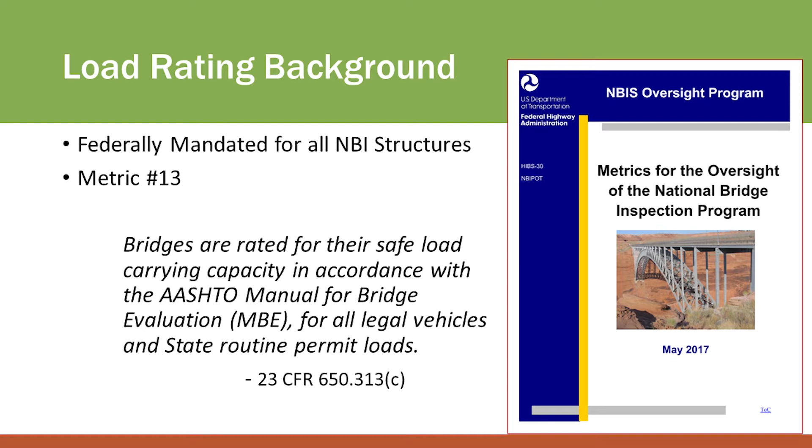So many of you know what this document is. It's the metrics for the NBIS. Metric number 13 comes out of 23 CFR 650 subpart C. Bridges are rated for their safe load carrying capacity in accordance with the AASHTO Manual for Bridge Evaluation for all legal vehicles and state routine permit loads. So we have to load rate NBIS bridges.

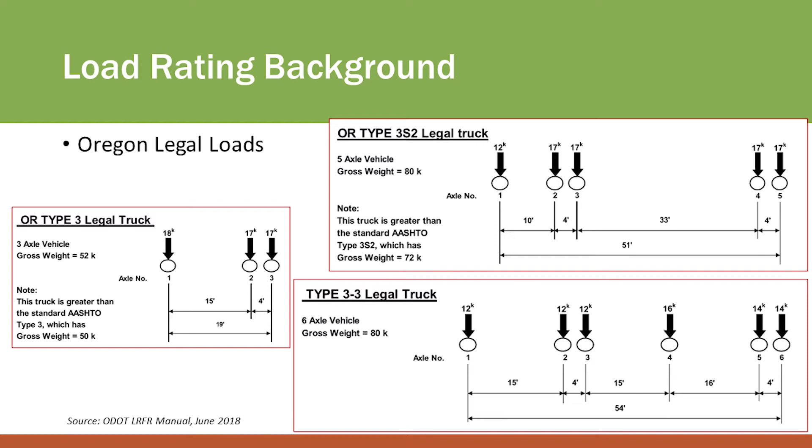These are the traditional classical trucks that many of you are familiar with, the Type 3, 3S2, and 3-3. ODOT does bump up their Type 3 and 3S2 slightly beyond what the AASHTO trucks are, but these are a 52 kip truck and then two 80 kip trucks.

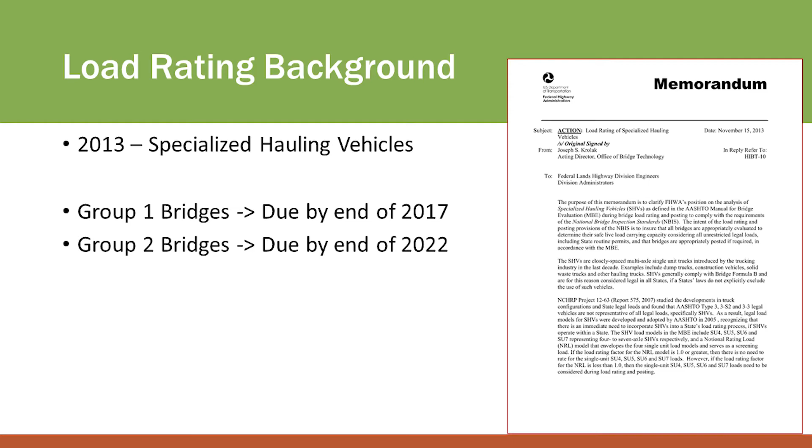Then in 2013, we had the memo from FHWA to clarify the load rating requirements for specialized hauling vehicles, or SHVs. It grouped it into two different categories. So your Group 1 bridges were the maybe worse bridges. These were due by the end of 2017. Group 2 is due by the end of next year, 2022. Basically, Group 1 bridges are bridges with rating factors of less than 1.3 for your traditional Type 3, 3S2, and 3-3 loads. It's kind of a screening.

Many of you have heard of the SHV Group 2 deadline. That's next year.

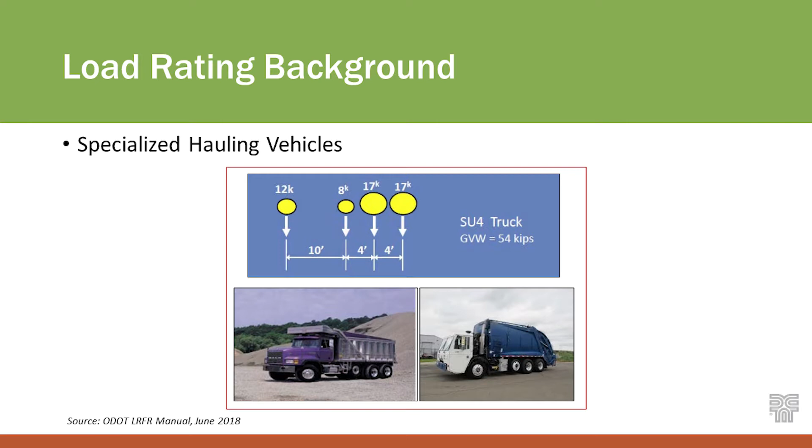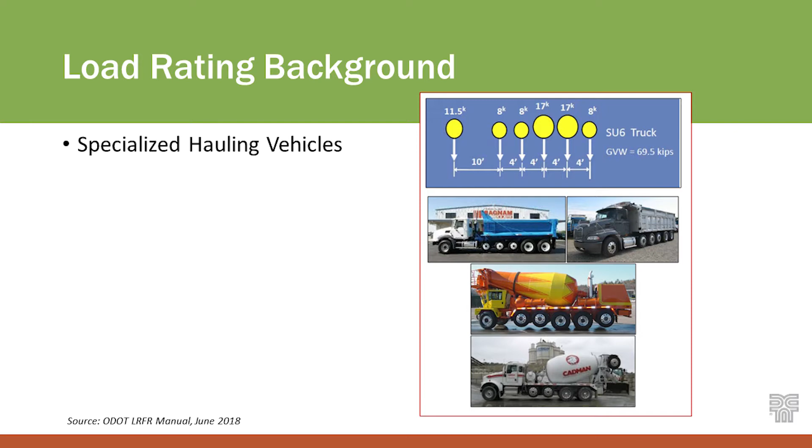What are the specialized hauling vehicles? This is the SU4, a 4-axle heavy hauling truck. SU5 is a 62 kip truck, and we just keep adding axles and length and weight to our trucks. SU6 and SU7 -- these are all legal vehicles on our roads that we have to rate bridges for now.

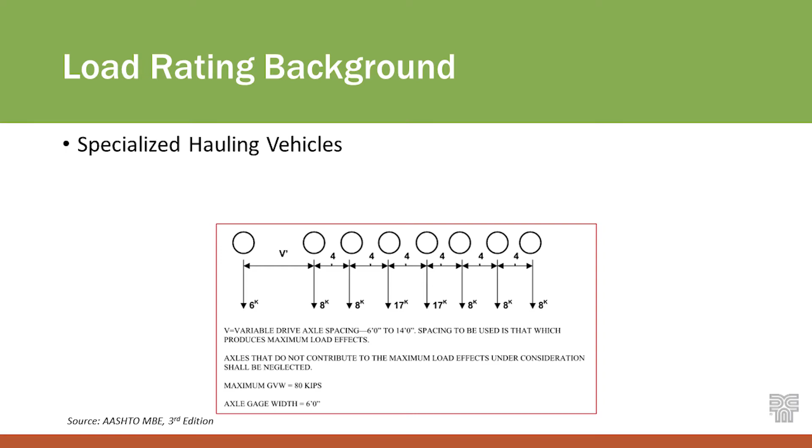Then we have the notional rating load, the NRL. ODOT does not use this. A lot of states do, as a screening load. If this passes, then you don't have to rate the 4 SHVs.

Then fast forward to 2015, and we have the FAST Act, the Fixing America's Surface Transportation Act. This is when we got into emergency vehicles. Now, for emergency vehicles, the first caveat is it has to be on an interstate or within 1 road mile to or from the interstate. Some states have decided to just rate all their bridges for emergency vehicles because they're doing it anyway.

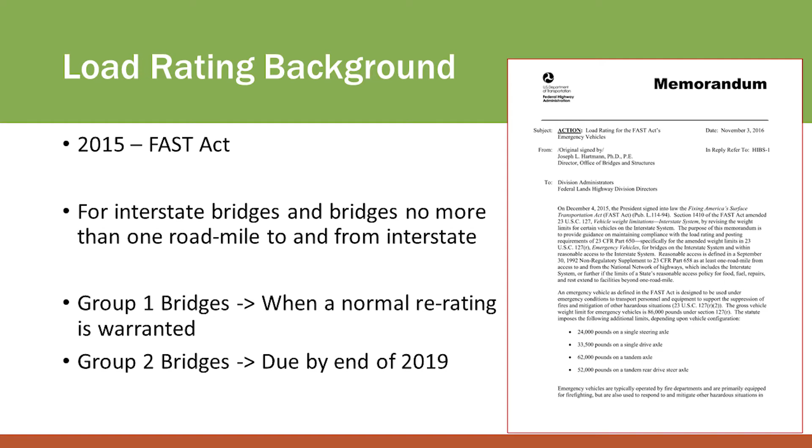Again, we have two groups, but this one's backwards -- Group 1 is good, Group 2 is bad. Group 1 is inventory rating factors for HS20 greater than 1.0, HL93 under LRFR greater than 0.9, Type 3 truck greater than 1.85. If you meet those criteria, you can re-rate the bridge for emergency vehicles whenever a normal re-rating is warranted. Group 2 is worse, got to be done by the end of 2019. Some states are on plans of corrective action -- maybe they didn't make that deadline, but that was the official communication in 2016.

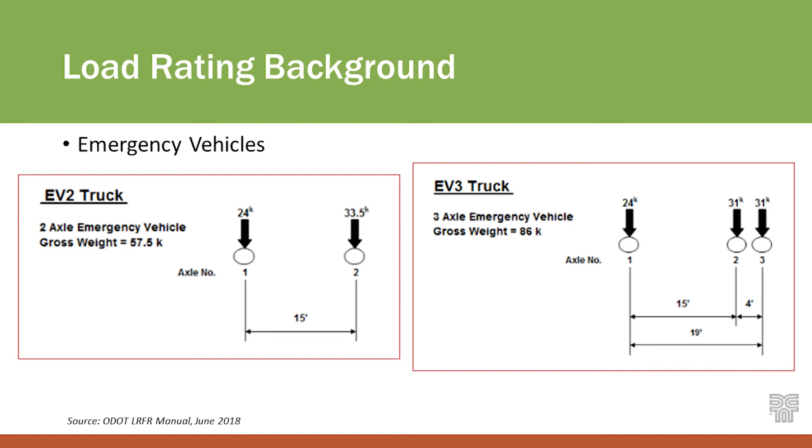So what are the emergency vehicles? Well, they're very heavy over short wheelbases. You're talking about a 57.5 kip truck over 15 feet, or an 86 kip truck over 19 feet. Heavy, heavy axles.

62 kips in tandem on the EV3. You can imagine for short spans, this truck very often controls.

So what's the big problem here? Well, it's concentrated loads. It's these heavy axles. Let's look at the Type 3 S2.

This is our standard tractor trailer. We're over a 51-foot wheelbase, and we're at an 80 kip truck, very standard truck on the interstate highway system. Now look at our EV3. We're an 86 kip truck, so heavier truck over a 19-foot wheelbase.

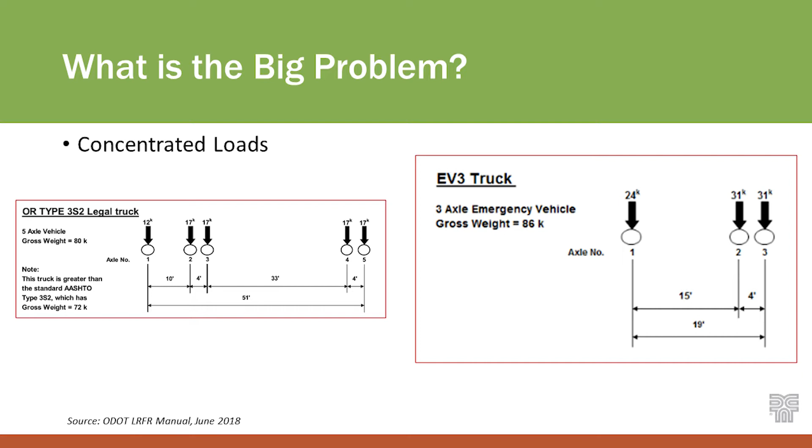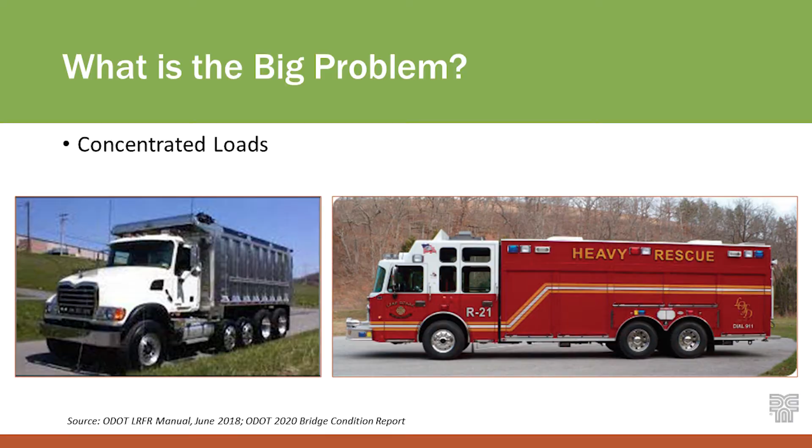Very heavy. ODOT's load rating program, how is it structured? What does the framework look like?

This message is echoed in many other states as well, just a growing inventory of preservation and replacement needs. So I wanted to go through, okay, how big is ODOT's program compared to other neighboring states?

So Washington is 8,338. Now this information is from the InfoBridge portal, so there may be some error. This also includes bridges that are located in these states that may not necessarily be owned and maintained by the state or local agencies, like federally owned and maintained and inspected bridges.

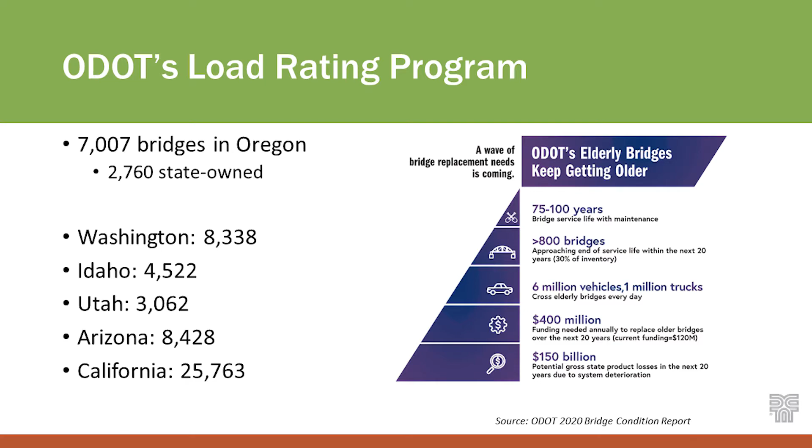Idaho is at 4,522. Utah is at 3,000 and change. Let's come here to Arizona, 8,428. And then just for grins, California, wow, 25,763. So that kind of gives you an idea of what Oregon's inventory looks like with respect to other area states.

ODOT has a really strong internal staff of load rating engineers led by John Rupert, who's their senior load rating engineer. But the vast majority of the load ratings coming out of Oregon are through their consultant partners. Those partners I've listed there.

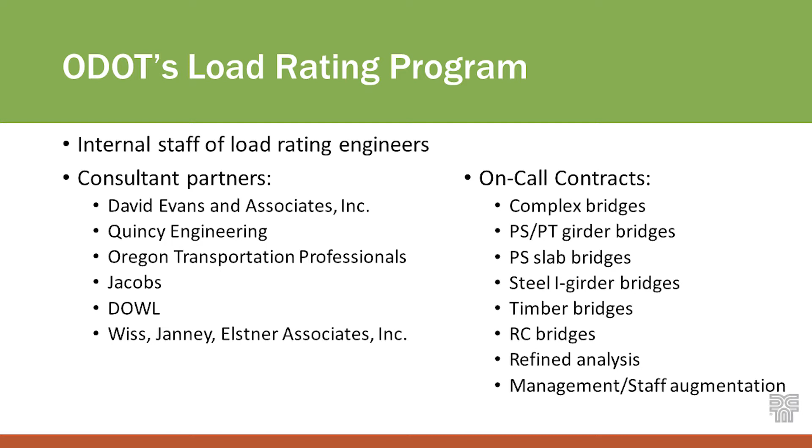We have several different on-call contracts that are all based on bridge types. So you go all the way down the list. Towards the bottom, you've got refined analysis, and I'll talk about that towards the end of the presentation.

There's also a management and staff augmentation contract. There are several contracts where we help the department scope load ratings, new work order contracts for other consultants. We can't scope our own bridges or assign our own bridges. We review load rating packages put together by other consultants, and just any other type of staff augmentation work that ODOT could potentially need.

We have some poor load rating results. We know that. We're rating for these heavier vehicles. Now, what's next? How does ODOT respond?

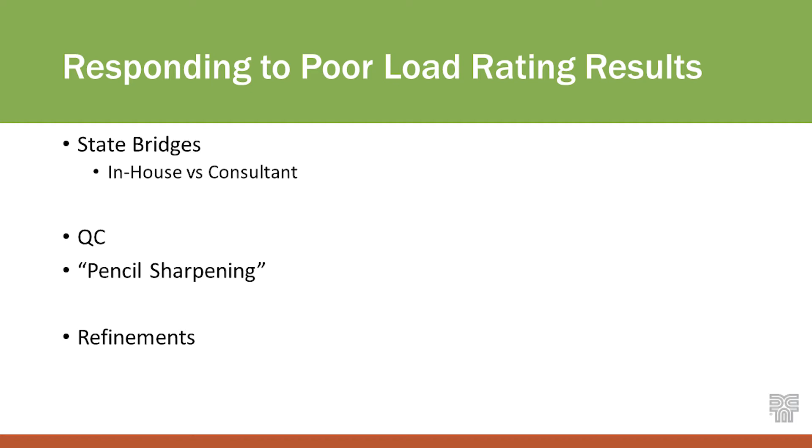You get to the end of your QC and you have some low rating factors. Well, there's always some pencil sharpening that can be done. We always love that term, pencil sharpening. And it's funny how that has become like a technical term. Like we'll get a load rating finished up by one of our load raters, and rating factors are 0.85 for the SU5. And I say, well, have we pencil sharpened yet? That's like an official term now.

Load rating in and of its own nature is you use conservative assumptions initially to get through the process efficiently. So you document those assumptions, and when you come back and get low rating factors, you know exactly where to refine some of those assumptions. That's always done before on the consultant side, before the package goes into ODOT. Once that package goes into ODOT, then you have to make decisions on whether or not refinements need to be made or can be made.

For state bridges, ODOT has a lot of different levers they can pull for refinements. I mentioned the refinement price agreement, where they can package up refinements and send it to a consultant and say, this is what we want you to do - either a grillage model, refining your live loads, or even instrumenting and load testing something. We also have quite a bit of leverage in terms of contingency scope on particularly complex load ratings, where we can say, this is what we're getting, it's because of this live load thing or this capacity thing, and if we do this, this, and this, we can refine it. And they say, yes, go do that and give us a budget for that. So that's another lever they can pull. They can also go down their own internal flowchart once we submit the package and decide how they want to proceed. There's a bunch of different options ODOT can utilize there.

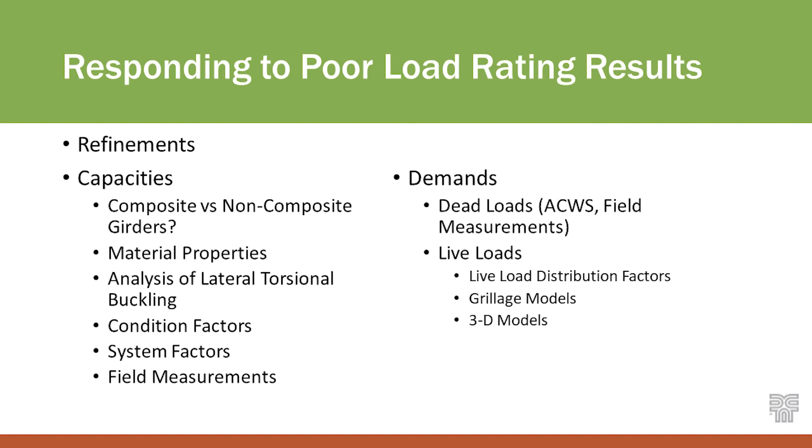And then just field measurements. Sometimes many of us that load rate know that the information that we have from some of these local agency bridges that were built 60 years ago plus can be very poor. And so sometimes it's just a matter of going out there and realizing that, hey, we've got diaphragms, or we've got the owner welded on cover plates 25 years ago, or something like that.

Conversely, we can refine demands as well. Dead loads are fairly simple - we can do some investigation to determine our asphalt wearing surface thickness. Live loads are usually the second place we go. The first place we go is capacity. The second place is live loads.

Again, Bill mentioned in his presentation, live load distribution factors are inherently conservative per code, and so oftentimes we can justify reducing those live load distribution factors either through grillage models, 3D models, things like that.

So just a few examples of some bridges in Portland that we have experience doing some refinements on. I'll hit these fairly quickly - each one of these could probably be its own presentation. In fact, I think the St. John's Bridge in Portland was its own presentation at Western Bridge a few years ago.

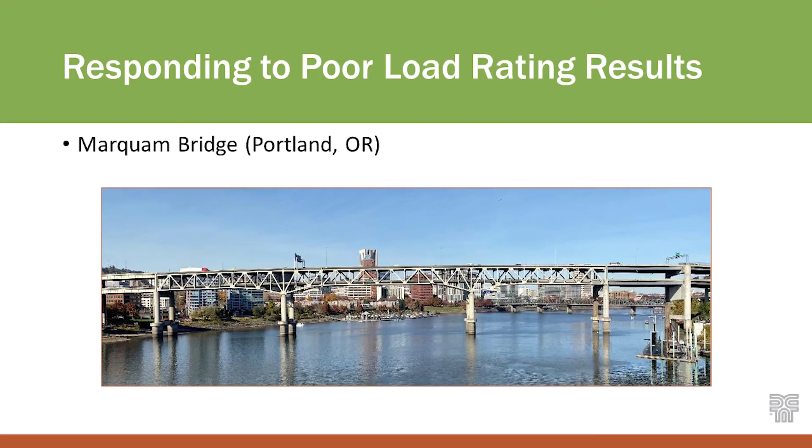But this is the Marquam in downtown Portland. It carries I-5 over the Willamette. It's kind of like the redheaded stepchild of Portland bridges. I think it's a cool looking bridge, but people in Portland seem to like the other ones a lot better. It's a double deck truss.

So this one we had low rating factors for permit loads, for state permit loads. On the top deck it was controlled by negative moment in the continuous stringers - it was lateral torsional buckling, laterally unsupported compression flange in the stringers.

Normally when we load rate bridges, the first thing that I teach younger load raters - they come to me and say HL93 is 0.6. Okay, well, okay, nope, no big deal. Type 3, what's your Type 3? What's your Type 3S2? What are your SHVs?

And so on this bridge, all the legals were above 1, and the permit loads - a couple of permit loads were less than 1. And I thought, this is going to be a problem. We can't permit restrict bridges on I-5 going through downtown Portland. ODOT's not going to be happy about that.

So what they had us do was a buckling analysis, a finite element model. Basically generated a finite element model for the girder, applied load to it to get the first, I think, 3 modes of buckling. This is the first mode of buckling shown in plan view, which corresponds to LTB. Calculated the load to get that form of buckling, compared it to the load to get yielding, came up with a safety factor of 1.53.

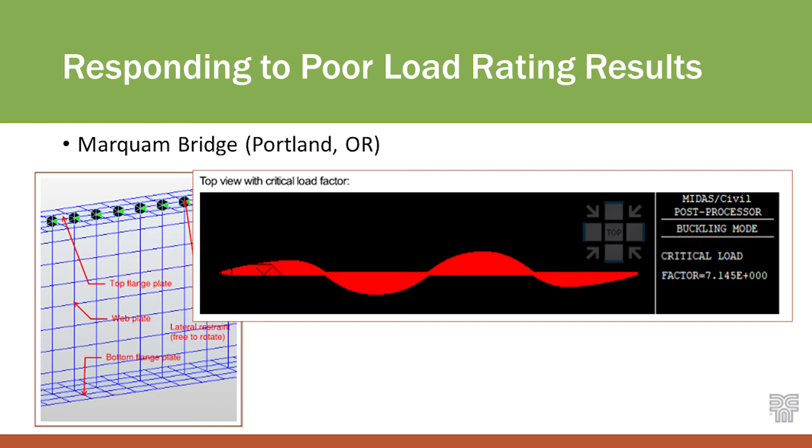So through that, we were able to justify updating the truss model for the stringer to laterally support the compression flange and force it into yielding instead of buckling, and that eliminated the low rating factors for permits. This is the Hawthorne Bridge, also in downtown Portland.

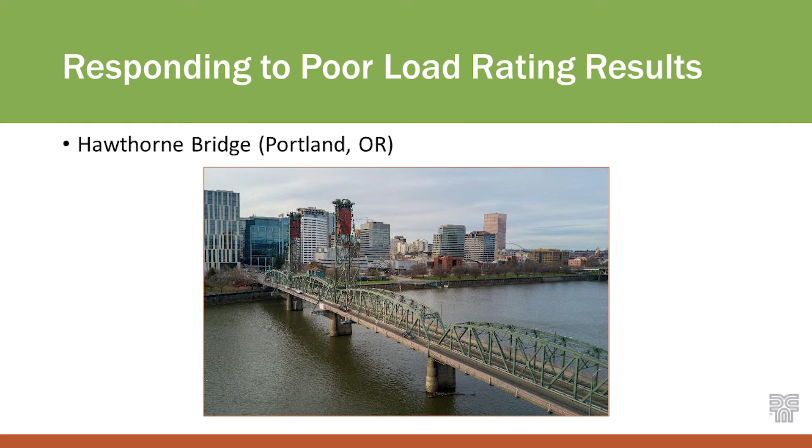This is a local agency-owned bridge. Multnomah County owns this. I believe it's the oldest operating lift span, working movable bridge, in either the United States or North America. It's from 1910, I believe - super cool bridge. This one had also low rating factors, but for positive moment in the stringers.

This is a steel grid deck bridge, so there's not a whole lot of lateral support for the stringers. Very similar process here, we did a buckling analysis. This was a little bit different though, because this is not a state bridge.

When ODOT got the rating factor results, we were getting some low rating factors for SHVs. They communicated that with Multnomah County. Multnomah County waited for the rest of the bridges in this complex to get rated under several contracts. Once they realized the Hawthorne had the controlling rating factors for the whole complex, they said, okay, can we do some refinements?

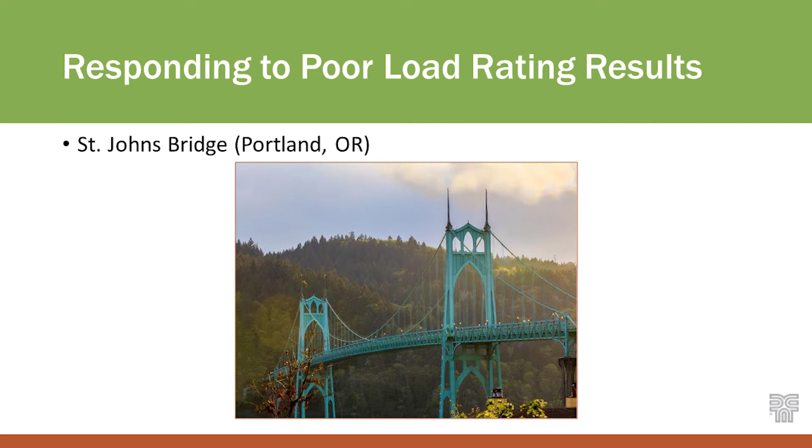And we had some contingency scope that we could do some refinements on this one. The St. John's, I loved Chris's presentation about stiffening trusses. Stiffening trusses really make you scratch your head. This was a bridge that we had low rating factors all over the place, but predominantly in the stiffening truss.

And so what we ended up doing was we knew that this bridge was going to need strengthening, but we also knew that if we could eliminate the stiffening truss members from the strengthening scope, we could probably eliminate 50 to 75% of the scope.

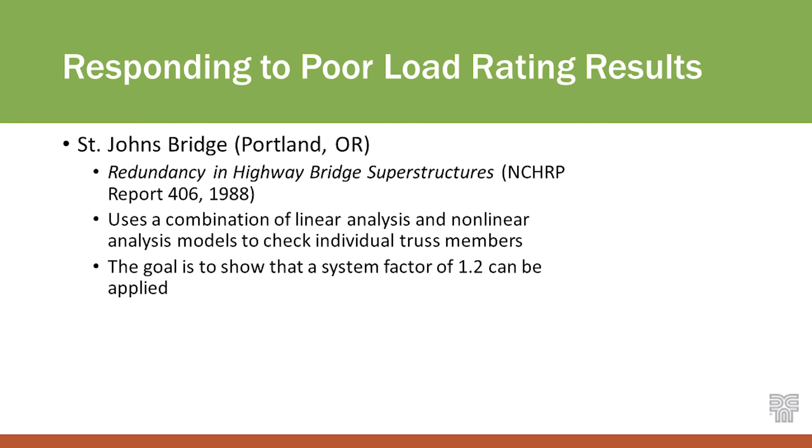We did a redundancy analysis on the stiffening truss itself, where basically we used a combination of a linear analysis model and a nonlinear analysis model to fail a handful of members. These are the members that we looked at, a handful of members that were rating out low, and see how the loads redistributed.

And because it's a stiffening truss and you had all of those suspender cable connections, loads were able to redistribute past the failed member without any increase in load on other members beyond their elastic limit.

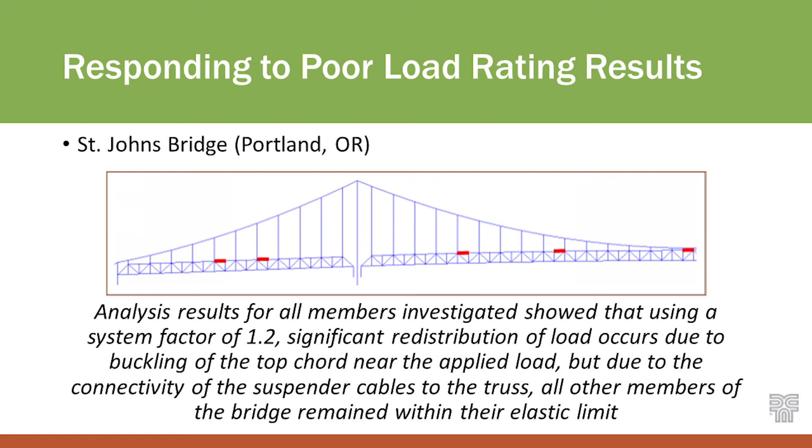This redundancy in highway bridge superstructures talks about this. This is from way back in 1988. And the MBE allows you to go up to 1.2 if you can justify it. So we justified it, went up to 1.2, and we're able to eliminate those members.

How do we communicate this to the local agencies? Well, this is the kicker. Look at these numbers: 178 posting letters sent to locals in 2019, 176 in 2020, and in 2021, 303 posting letters. Now, this is very direct and targeted communication to local agencies, and you can see what kind of a political and an outreach issue this can be.

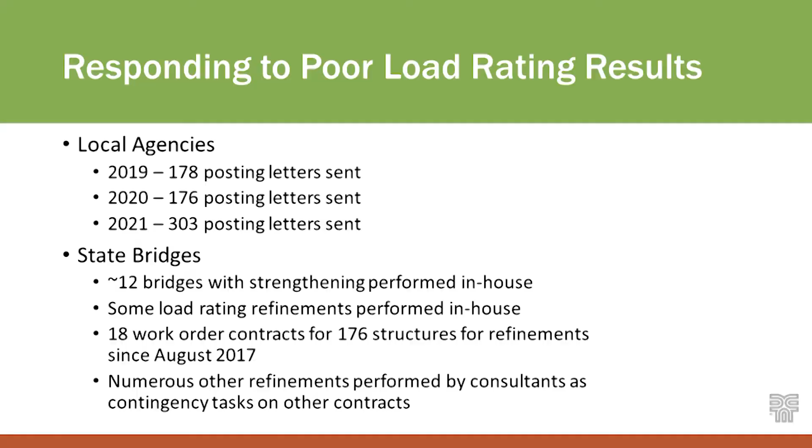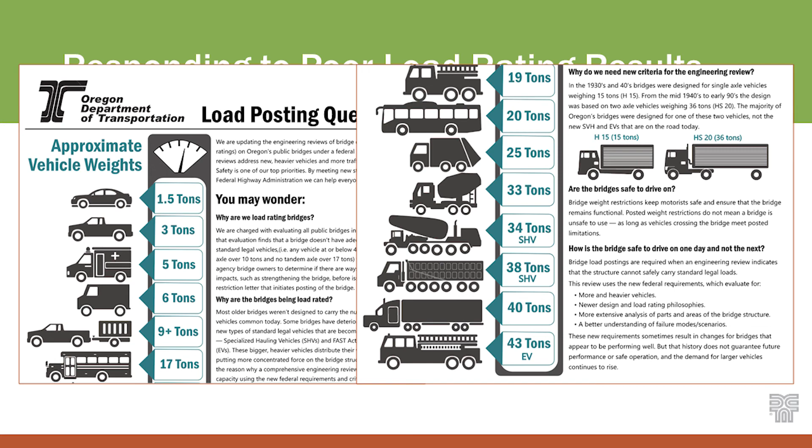So the outreach to the local agencies is critical. ODOT created a flyer, I think last year, that really talked through, okay, what does this mean? How heavy are these loads? Why do we need to rate these bridges? Why, as Travis likes to say, once we rate it, if we don't post it, it's going to turn into a pumpkin and collapse, right? What's the reasoning behind why we actually need to do this? And that's been a big part of ODOT's program, honestly, for the past couple of years, is just that outreach to local agencies.

So in summary, the impact of load ratings for SHVs and emergency vehicles has been huge and will continue to be huge, both for the state and for the local agencies. ODOT does administer all the load ratings for NBIS bridges in the state, including local agencies. Consultants do perform the bulk of the load ratings. For poor load ratings for state bridges, they've got some options: they can refine in-house or through consultant contracts, or they can program strengthening projects.

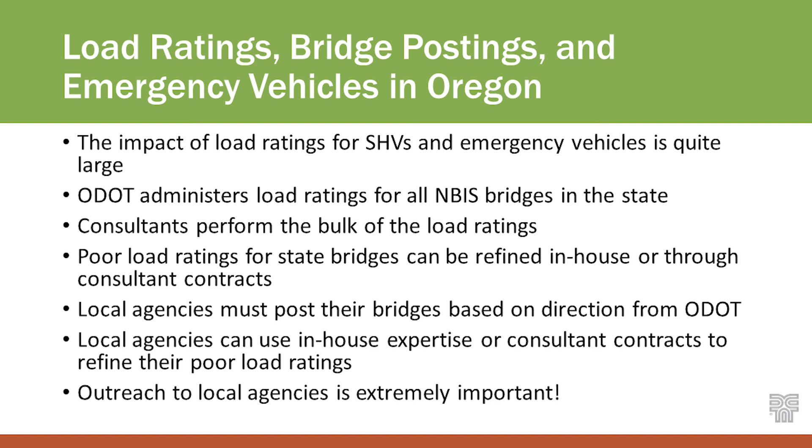Local agencies must post their bridges based on direction from ODOT. Local agencies then have the option to use in-house expertise, which some counties have, some cities have, or consultant contracts and consultant relationships to refine their poor load ratings if they want to avoid posting. And the outreach from the state to the local agencies has become extremely important.